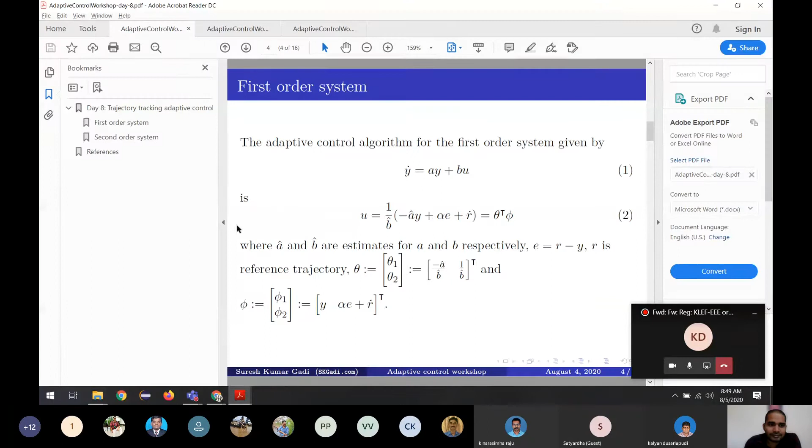So yesterday we started with the adaptive control. What we have seen yesterday is if we have a signal, your output should follow the signal or the reference. You can say if we have some reference, the output of our system should follow the given reference trajectory. But what we have seen is we have kept some limitations on the trajectory. For example, we said it should be continuous, and its first differentiation should be continuous. So we started keeping a lot of restrictions on our reference signal.

But in real life, it is not always possible to keep certain restrictions on the reference signal. So the other method is, instead of going with that, we say we want our system to behave like some other system. So what does it mean? Let us say we have a robot, and this robot is a first order system. And I also know that an RC circuit, a resistance capacitive series circuit, is also a first order system. And I like the RC circuit. So what I want is this robot dynamics should be the same as the dynamics of an RC circuit.

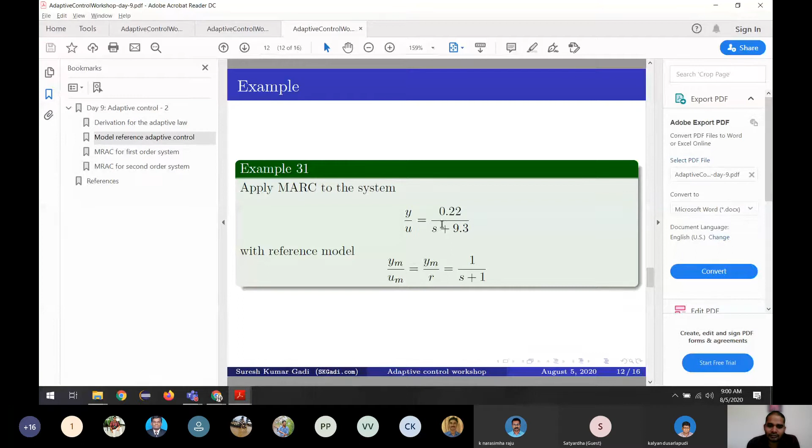So if you see, we have two models. One is the plant model. The other one is the reference model. The plant model is something which you can't change. The reference model is something which you desire to have. So if you see the output for a sine wave,

So if you give a sine wave, the reference is this one, which is almost reaching 1. The plant is behaving a little different. It is reaching less, it's around 0.02. What we want is the plant should have the same output as the reference model.

So we give another example where instead of a sine wave, we will give some other step wave, or in this case I'm using a square wave. Why I'm using a square wave is, initially in the previous algorithm we said we can't use square waves or triangular waves, but here we can, because we are not taking the signal of the reference, we're taking the signal from the output of a model. So let's see how this reacts to this signal.

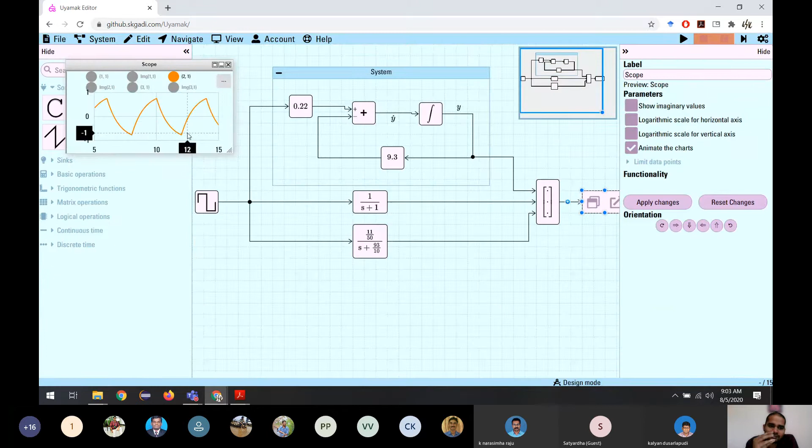But we want our system to behave like this. We can say for now something like a triangular wave. Not exactly, but for our convenience, we'll say it looks like a triangular wave. So our system is behaving like a square wave, but we want our system's response to be like a triangular wave. So we have to apply the MRAC to make sure our system behaves like that. We will apply the algorithm and see. First we will see how it works with the sine wave, and then we will apply it for the square wave.

So before going there, let us see how this algorithm is implemented. Here we have one system. The system is this one, which is a robot. And we have a model. The model is given by this one, 1 divided by s plus 1. So what we want to calculate is theta and phi. If we have theta and phi, we can calculate u and insert it into this.

So let us first find phi. How do we get phi? Phi is a matrix of 2 rows. The first row is y and the second row is r. Y is the output of the system. R is our reference. So we see where phi is. This is phi. Phi is the output of the system and the reference r.

And then we calculate e_m. e_m is from the model's output and our system output. The model output is this one, the output of the reference model. And our system's actual output is this y. So y_m minus y is the error. Actually, we call it error m. So it is the error, the difference between the reference model and the actual plant.

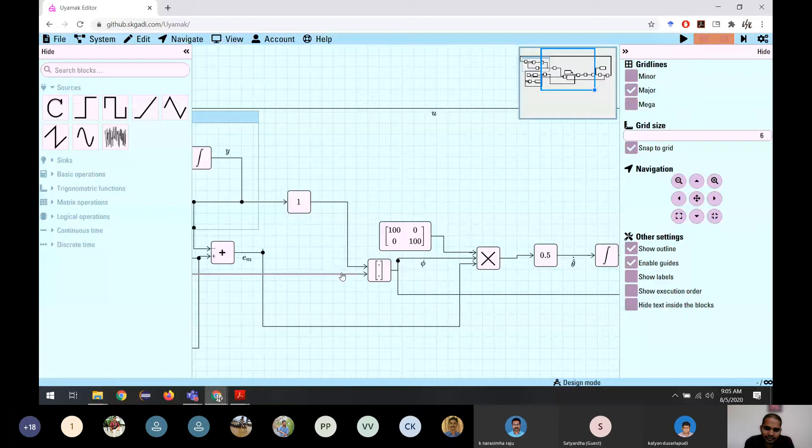And what is the algorithm? It says gamma times the error times phi. So we have gamma, error, phi. We multiply all these things, which gives theta dot. So theta is here, and u is theta transpose times phi. So we are multiplying by phi, and the multiplication of these two gives us u. So we feed this to our plant, to our system.

So let us measure the signals we receive. What we are plotting here: the first terminal is the plant's output. The second terminal is the reference model output. So we say first is plant versus reference.

So what we expect is both should coincide each other.

So at the beginning, we can see the plant is different from the model, but as the time progresses, it's slowly getting closer. I have chosen gain values a little smaller so that it takes long time and we can appreciate how it is converging. So if we give big gain values, it will converge a little quicker.

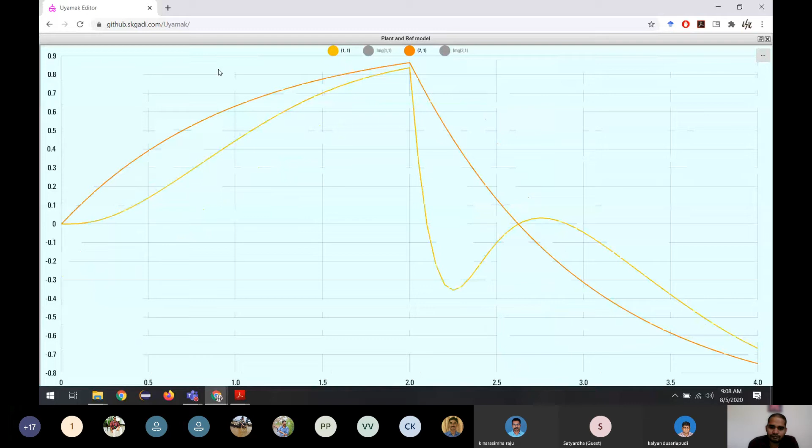So the plant is trying to meet or exactly mimic the output of the reference model. As the time progresses, it will slowly reach and it will look exactly like the reference model. So already we can see it is getting very close.

So from here we can say it is exactly mimicking. At the beginning it was very different, but as the time goes on, see, we can see how it is different. So it is very different. You can clearly see that the controller is updating itself continuously and it makes sure the output is a triangular wave. As I said, triangular is the word I am using for simplification of explanation. So it was something else, but it's adapting itself to make sure it looks like a triangular wave.

Okay, so if you have any doubts, please ask me now.

Let us see an example. We saw this algorithm yesterday. We'll finish the example, and then if you have doubts, please ask me. So what does the example say?

Again it uses our model or our robot, and it says I want this to behave like this system. Why I have selected this system is because it has some oscillations, and you can see that the transition between this normal behavior to this behavior is something little dramatic. So I want to show you that, and we will get some information from that. We can appreciate how the control algorithm is working and the stuff. So I selected this value.

Okay, so let's see how this example we can work out. Before going there, we will see what is the response for this plant in the open loop. So if we go like this.

So what I'm doing, this is a plant and this is a reference model. What I want to see in this graph is, first, the plant and reference model. We will see the responses of the plant and the reference model. So we give a square wave, and we will see how these two look like.

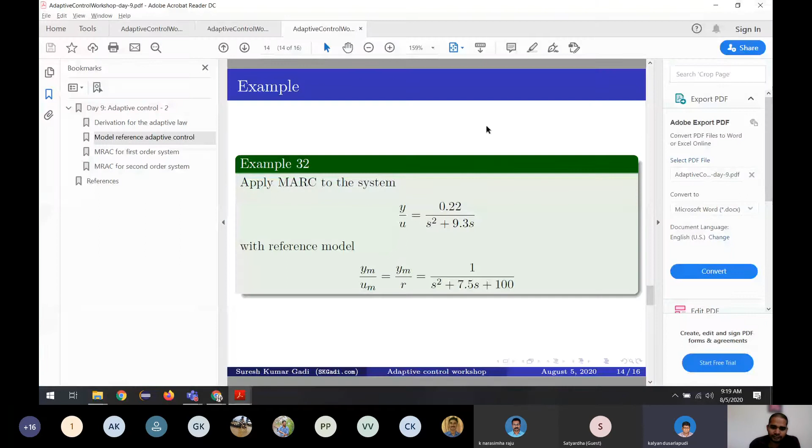Okay, this is our algorithm, and we see it is implemented like yesterday, but let us go very quickly through how it is implemented. So we have a reference model, and we have the plant. We put the plant here, and we have a reference model here. So first, let us try how we calculate this Z.

Z is calculated by, actually it is betas, but I'm using alpha because I copied from yesterday's notes. So alphas are betas in this part. It is y double dot, which is the output. It is the sum of this: y double dot and beta 1 times, or alpha 1 times, the error between the model and the actual value. E is the error between these two. This one is E dot and this is E, so this is after differentiation and this is before differentiation. So you are getting this.

So this is what we are getting here is Z. Then what is the phi? We have to get the phi. Phi is of 3 elements: the first element is Z, then Y dot and Y. We changed the order a little, but it should work.

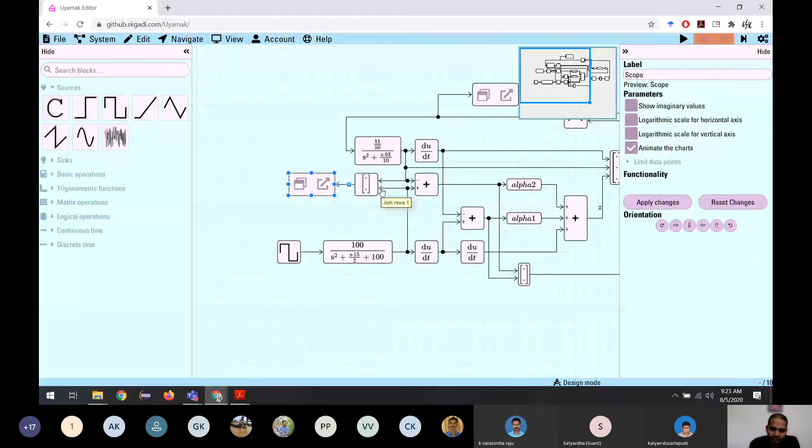So what is the graph I'm drawing? I'm drawing between the first one, the reference model, and the second terminal, the plant's output. So we say it's reference, and let us run this and see how it behaves. Let me start. If you see, both are coinciding exactly, so we can say our algorithm is working and both are converging.

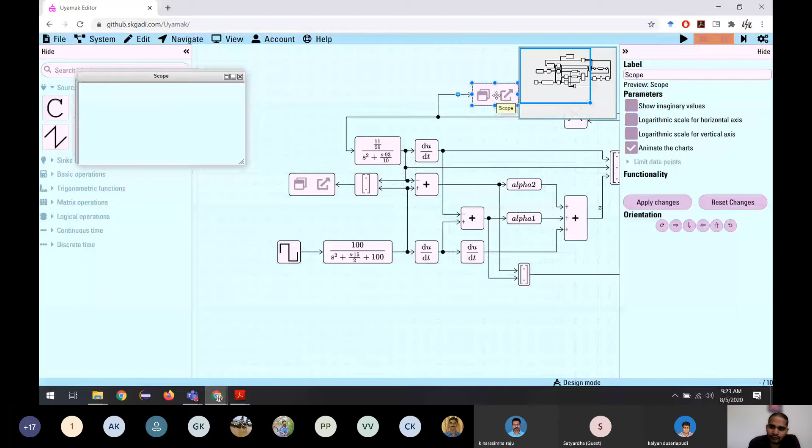Let us see what is the output. What we are seeing is the output of the algorithm, or input to the plant. This is U, so what we are plotting here is U, input to the plant. Let us run this and see what we are giving as input. Let us start. So to get the desired response, what we are giving to the plant is this signal. If we give this signal, only then does our plant behave like how it is behaving.

So how do we come up with this signal? By using adaptive control. Now let us see by giving a little gain. So now what we are giving here is a big gain, and it is immediately adapting very quickly. If you see here, it is adapting in less than 0.5, or 0.05, or we can say by 0.1 second, it is almost mimicking the model. But what we'll do is give a very small gain. The gain I'm talking about is the gamma. Where is the gamma here? This is the gamma. The value I'm using looks like a small number to us, but let us see what's the value.

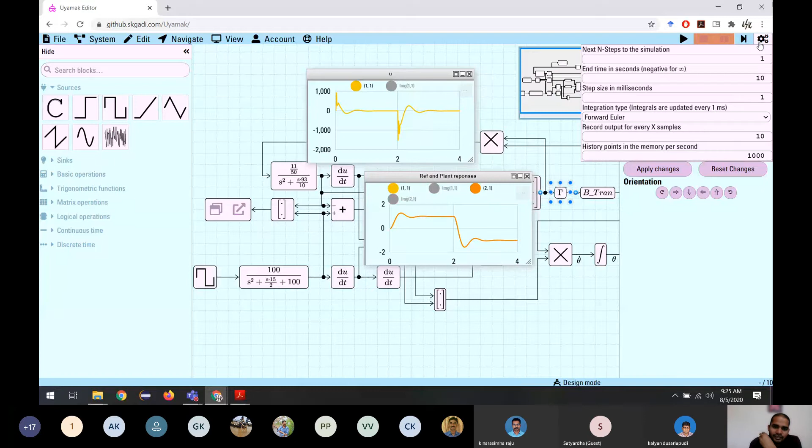The gamma we are using is 0.1 here in this example, and it is giving very quick convergence. So this is actually good for us, but for our purpose, for our understanding, let us give some very small gamma and see how the system is updating itself, how it is adapting itself to improve itself. So let us plot.

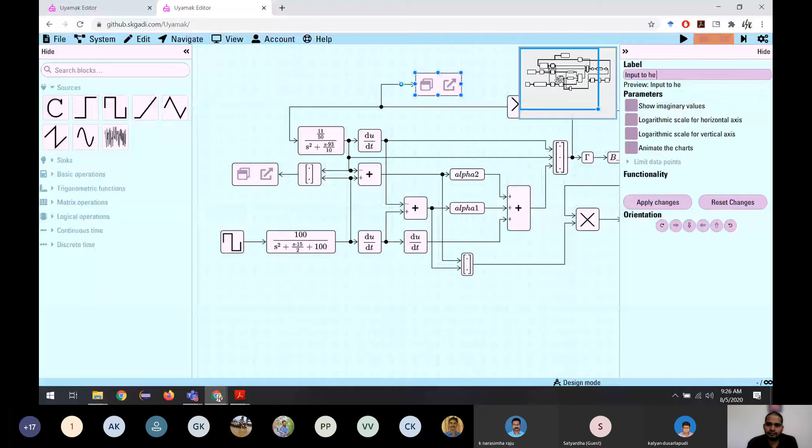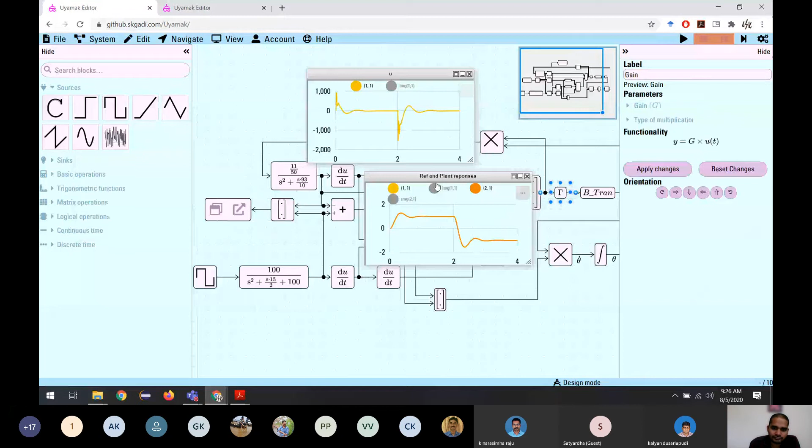This one is called reference and plant responses. So let us plot these two things. The input to the plant we have to give this, and we are receiving this. So we can see here the U is something like this, and the reference is this, and this is the behavior.

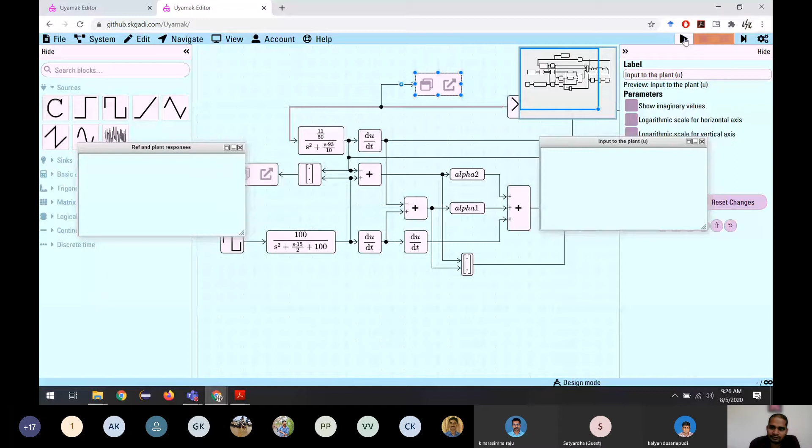So what are the gains we are using now? The gains we are using is a very small value, 10 to the power of minus 7, 0.000 with some 6 zeros and 1. So let us see how it behaves. As it starts, this is the control, and you can see it's adapting. If we observe here, it's behaving something very different, but slowly it tries to reach, it tries to mimic

the reference model. Until now it is not; you can see it will continuously try to change itself. It's updating, it's adapting itself to mimic the reference model as the time progresses. So by now you understand that as the time goes on, it will converge to the reference model. We can stop here because it will take a lot of time. Since the gain is very little, it will take a lot of time to exactly coincide.

But this is how we can see that the adaptive control is working. So this is all I wanted to show. If you have any doubts, please ask me.

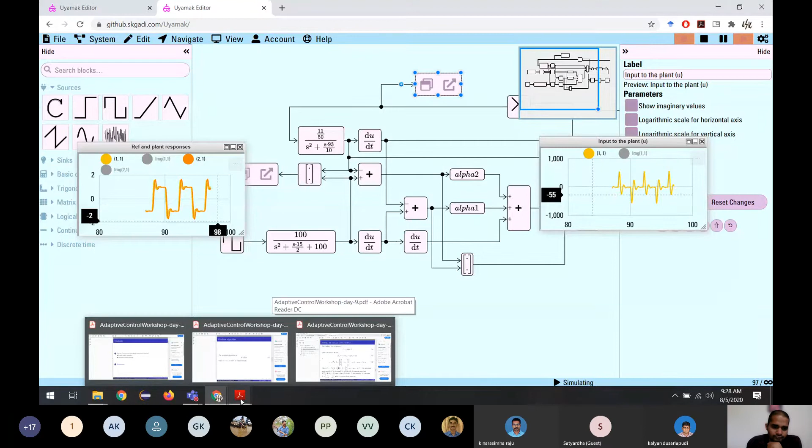So it will take some time for both to be exactly the same. But the big effect you can see at the beginning of the plot. It's plotting something and slowly it tries to converge with the reference model's output. If you have any doubts, please ask me.

Will this algorithm help us to maintain platform stability, where the system has to follow the reference, which we call a stable system? Yes. So when, in practice, the parameters change all of a sudden due to a sudden impact or some external inputs, will this algorithm still help us there? Yeah, it will help us, in certain cases.

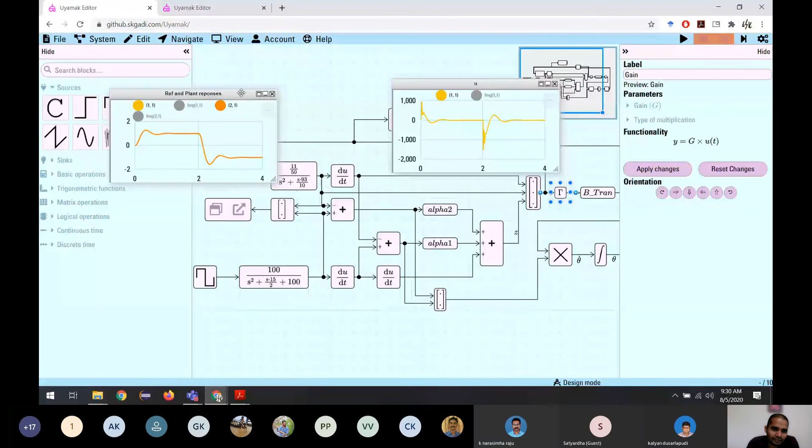Do we need to wait this much time? 60 minutes already, right? So the gain matters. The gain is what's called the adaptive gain. How quickly you want to adapt, it gives that value. If you give a very big value, it will reach quickly, but it will always remain with some error. You can see this one reached quickly, but if you go a little closer, there is a small error between these two, and this will never be rectified because the gain is too big.

So if you want very accurate following of the model, you have to select a little less gain. It will be more accurate, but it will take longer to reach. So you have to make the trade-off: you want quick convergence, or you want to converge slowly but get the most accurate value. You have to decide what your requirement is. In this one, we said it can be accurate but take a long time, just to see how it is adapting itself. So it's taking a very long time to adapt.

And regarding the changes, with adaptive controllers you can't change big values in a short duration. I mean, the parameters should not be changed with big differences, like from 1 to 100. You can't change like that. It can go slowly over time. It can go from 1 to 100, but not in 1 second. It should take some time. Only then can we guarantee that it is stable.

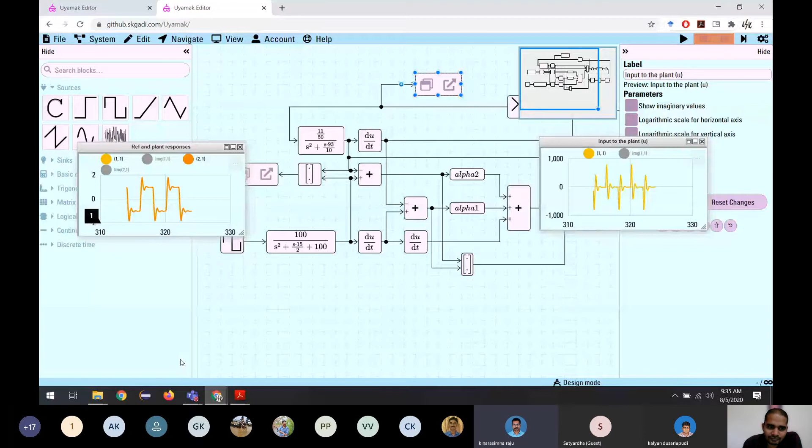Suresh, this reference model, whatever we are using, should it be kept in tandem with the actual model always? Because whenever the parameter is changing, the controller has to be retuned again, right? No, sir, no need to retune the model.

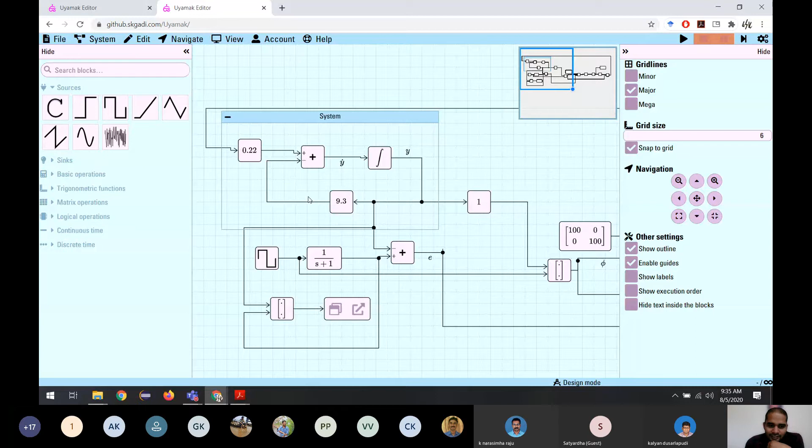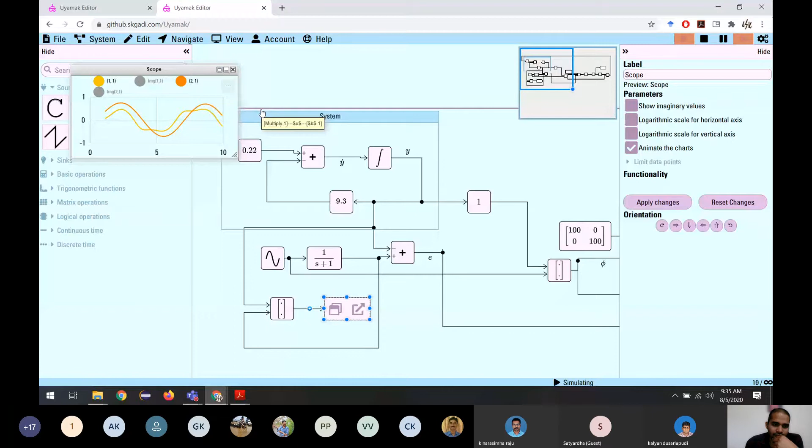Let me see if this example works. In this example, I have designed it so that we can change the parameters. Let us see by changing the parameters in this one, sir. So let us run this and see. Now instead of a square wave, let us use the sine wave, which is easy to converge. Let us wait a while until it converges, then we will apply this.

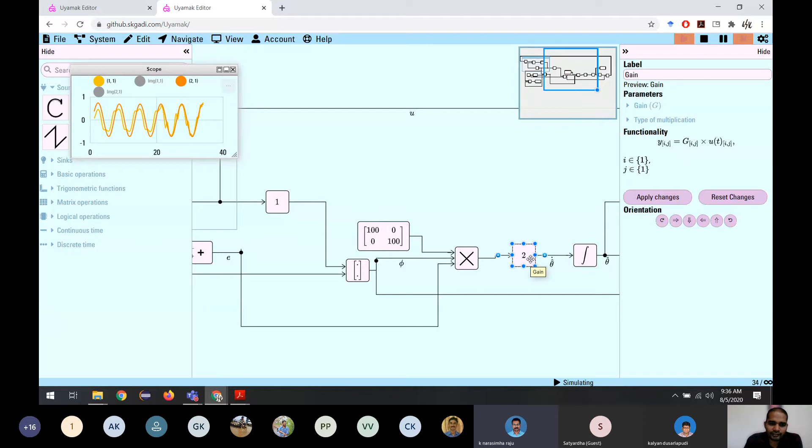But how does this conceptually happen? The controller and plant together are made to mimic the reference model, right? Is that what is happening? No, the reference model, if I show here, is something we are not touching, sir. What we are changing is the plant.

Controller and plant together are made to mimic the reference model. Is that what we are doing here? Yes, sir, you are right. So if the plant parameter changes, then obviously this reference model has to be kept in tandem with the plant always, right? How does this algorithm adjust itself if the plant model changes?

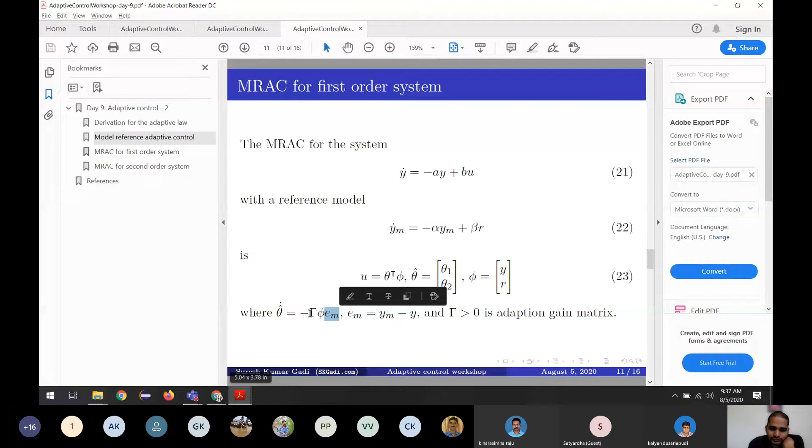Yes, sir. That we will see, because this is how the adaptive controller works, the gains are always changing. If you see the algorithm here, theta is updating all the time. Theta is not something constant. You see, theta is updating with this gain and with the error. So theta is updated by all these parameters.

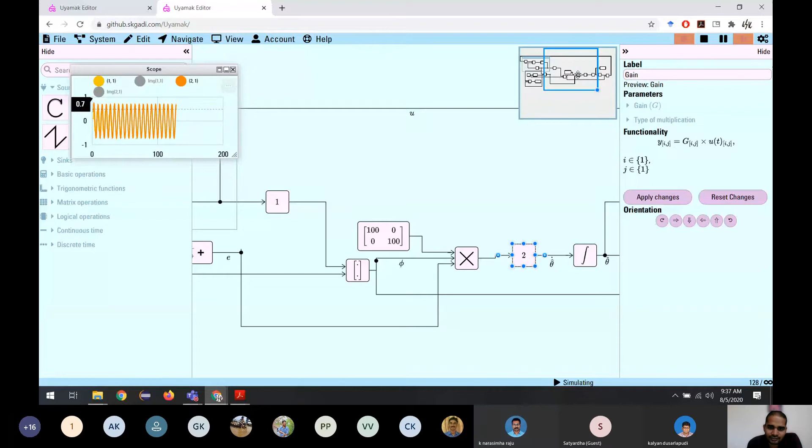E is the error, and P is something which makes sure it is stable, because we have done stability analysis and come up with this value P. And gamma is the gain, how quickly you want to reach convergence. So we can see the system is working; here both are coinciding. Now let us change the value of this parameter. Instead of 0.2, let us say it has become 0.5. Let us see if it works or not.

Here the reference model is still kept together. Yes, sir. The reference is the same, so you want our plant to behave like that. So if the parameters are changing for the system, as the plant changed, we can see there is some disturbance here. But as the time progresses, the adaptive controller gains are adjusted so that now we can see again it is mimicking the reference model.

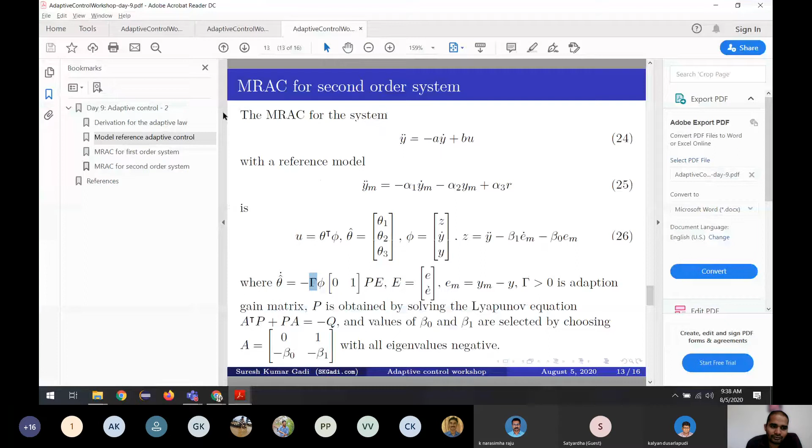Reference model has always to be in the control algorithm? It has to be there. Yes, sir. Reference model is something like how you want it to behave, so you always keep it the same, sir. You can change this as well. I can change it again. It will get adapted. Yes, sir.

It will be continuously adapting itself. So whatever you change, it will try to adapt itself. So you made some change here, but it adapted itself to make sure the output of the plant is the same as the output of the reference model.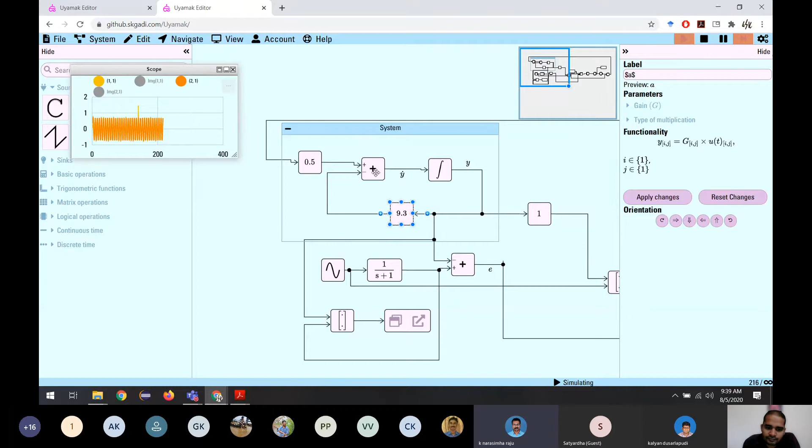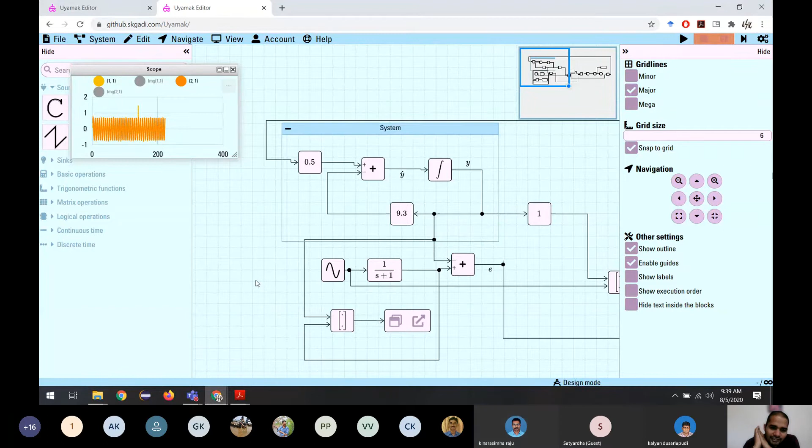Normally, the reference model which we take will be a kind of linear system. Because there will be a lot of non-linearities inside the plant, will we be able to adapt to all kinds, or are there some limitations in getting adaptation? Yes, sir. So whatever we are seeing here, it is only for the linear systems.

For the non-linear systems, there will be a lot of other things we have to keep in mind. For example, they'll remove the non-linearities by some other algorithms, which we are not seeing. If you have a nonlinear system, first we linearize by doing some changes like state feedback, and in that we try to implement the inverse algorithm by identifying the parameters and other stuff, which we didn't see in this course; it should be more in detail. There are algorithms which can do it, but not for all the nonlinear systems.

The nonlinear systems are like a very big chunk of material we don't know. Only a little part of the nonlinear models we have done. I mean, we means the whole world, the mathematical people, who have done only a small part of the mathematical nonlinear parts of the systems. Even for a simple pendulum, there is no perfect model which can say this is how the simple pendulum works. So there are big holes in the mathematical modeling and implementing non-linear control algorithms. So whatever we have is a very small tip of nonlinear algorithms.

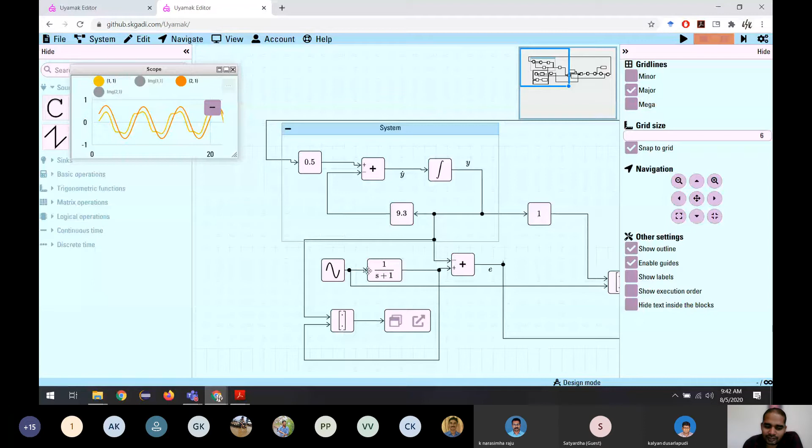So basically, adaptive control is used where there are variations in the plant parameters, and to adapt the controller to variations in plant parameters, we use adaptive control. Yes. Can it also be done for variation in states? The states are always changing, sir. So what we are saying is the states of this system should mimic the states of our reference system. So if the output is mimicking, internally, it is not always guaranteed, but most of the time the states are also mimicking the behavior of these states.

States are always changing, so only the parameters are somewhat stable in a system. Yeah, states are continuously changing. So can this even get adapted to changes in state also? Yes, sir. What this does is it changes the states in such a way that the system behaves the way we want. Okay. Yes, sir. This controls by controlling the states, sir. Okay, sir.

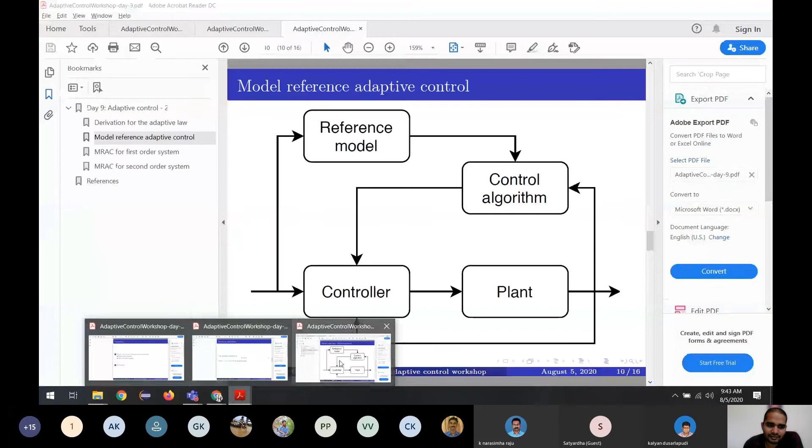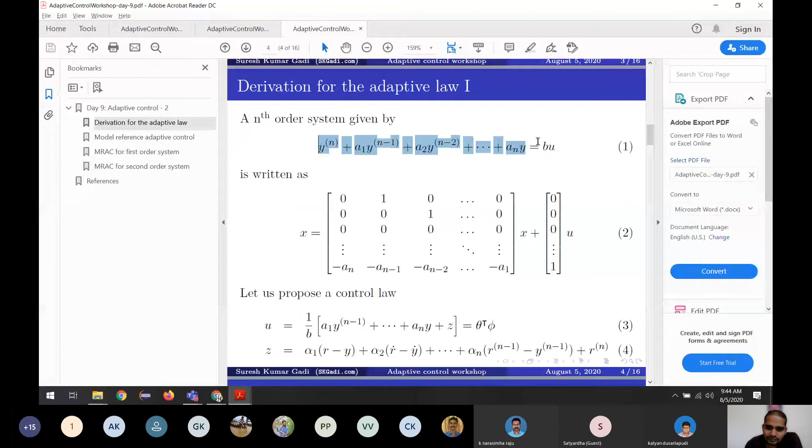Okay. So let us quickly go through this derivation process, what we saw yesterday, a little. Okay, so this is a system we said we want to control. The algorithm we are seeing is for following a trajectory R, the reference R. So we have this system and we saw yesterday how to write it in state space. U is the input to the system. What we want to give as input is this part and these terms.

In this, what is Z? Z is defined by these terms. Okay, so here we know everything except the Z. So let us write it in the form of theta transpose phi. The theta transpose is this, theta 1, theta 2. What are the thetas? Thetas are A of i divided by B. So you can see A1 divided by B is theta 1. So what is the last term? The last term is 1 divided by B, so we call it beta. Beta is 1 divided by B.

And what are the coefficients of this? Here this side is y to the power, as we said yesterday, y to the power of n-1 in parentheses; it means we are putting n-1 dots, or we are differentiating y with respect to time n-1 times. So these are differential equations, and we write them here in this vector. In the last term we know it is z. But what is z? The z is these terms, alpha 1 times r minus y and all these things.

If you put this equation 3 into our actual system, we multiply u with the one we have proposed here. So what do we have? This b will cancel with this b, and this a n minus 1 will be cancelled with this one. So all these terms are cancelled. So what we have is z, nothing else. So y differentiated n times is equal to z. All other terms are removed. So we are removing all the system dynamics and injecting some new dynamics with z. So what is z? All these things, right?

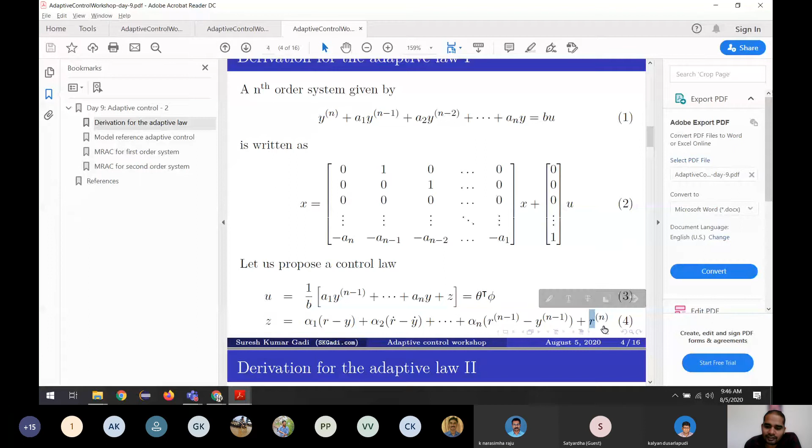All these things are on the right side, and we have one extra term r of n. So what is r n minus y n? It is e of n, right? We define e as r minus y, the reference minus the actual output y, which is the error. So what will we have? This equation: e differentiated with respect to time n times, and the terms alpha 1, alpha 2, up to alpha n. We can select the values of alpha in such a way that the system is stable.

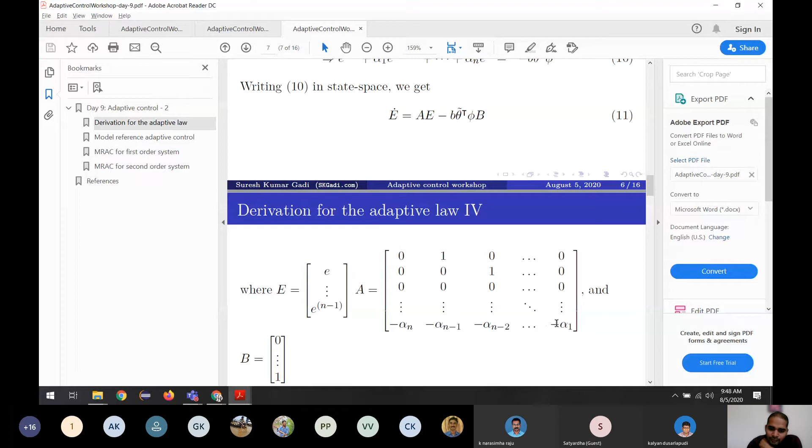So how do we select? We can write these alphas in a state space model. Let me show that here. Write E in this way. The A is this one, if we write it in state space model. So we can make sure this system defined in 5 is stable if and only if A has all its eigenvalues negative. We make sure the eigenvalues are negative by properly selecting these alpha values, and so we make sure this system is stable.

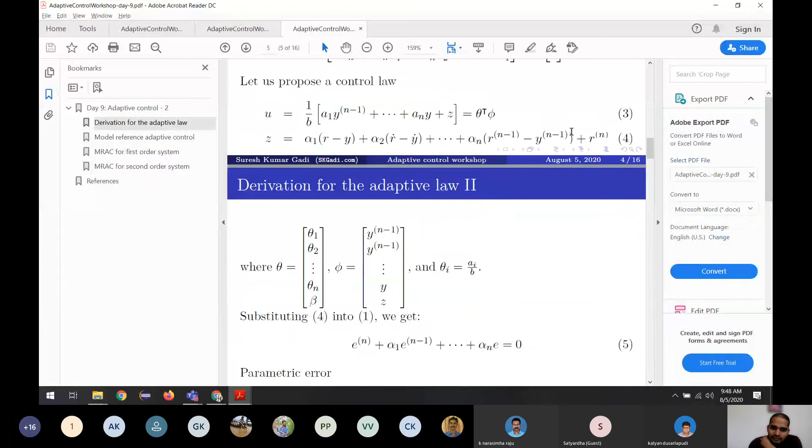So if we know the actual values of theta, our problem is done. We say it is stable, so the error goes to 0 as time goes to infinity. If error goes to 0, reference minus y is going to 0, so the reference is equal to y. So 5 is the end of the problem. But in real life, we don't know what theta is. If we don't know the value of theta, we can't put these values. The thetas are A and B values, and we don't know the actual values of A and B because the actual plant is not available to us.

So what we do, we say theta cap is the estimated values, theta is the real values, and theta tilde is the error between these two. So the theta estimated value is error plus the actual value. So actual value plus the error is the estimated value. So what we have is some estimate of theta.

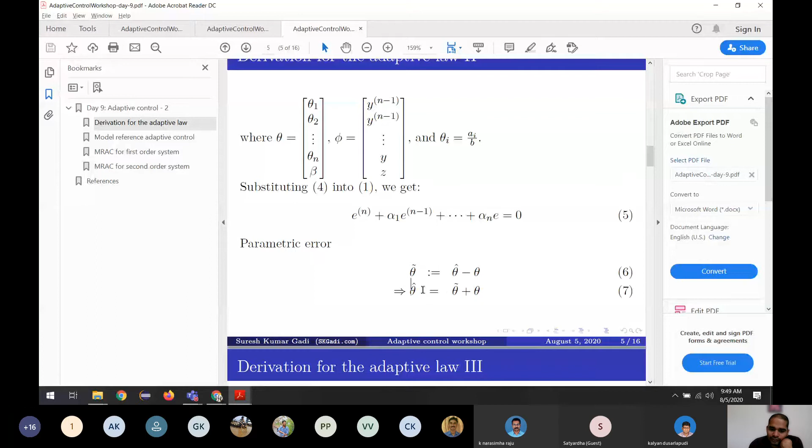What we do is, instead of using theta, we will use theta estimate in our equation. So if we have theta estimate, we can divide it into two terms: theta, the actual value, and theta error. So with this, we already know if you put theta.

You said you're going to spend this day with me. Okay, no. 1 second. Okay. Yeah, I'm sorry, my daughter woke up.

So let's continue. So here we are saying instead of theta, we have theta cap, which is the measurement. So theta cap is sum of actual values and the error value. So with the actual value, we already know the whole equation is simplified into this one, the E. And what is remaining is this part.

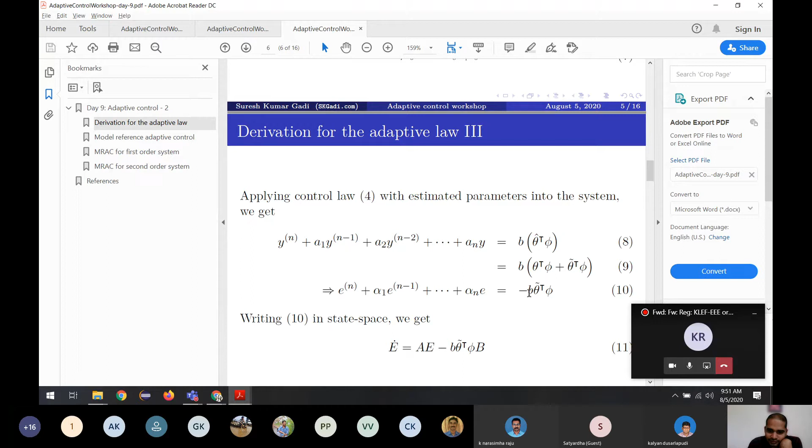So if we make sure this is going to 0, the whole thing is equal to 0, and we know if this thing is equal to 0, the error, this is a stable system, so after some time the system decays or goes to 0, the error is 0, and we can say y is equal to r. So what we have to make sure is this is equal to 0. So how do we do that? So we come up with some techniques.

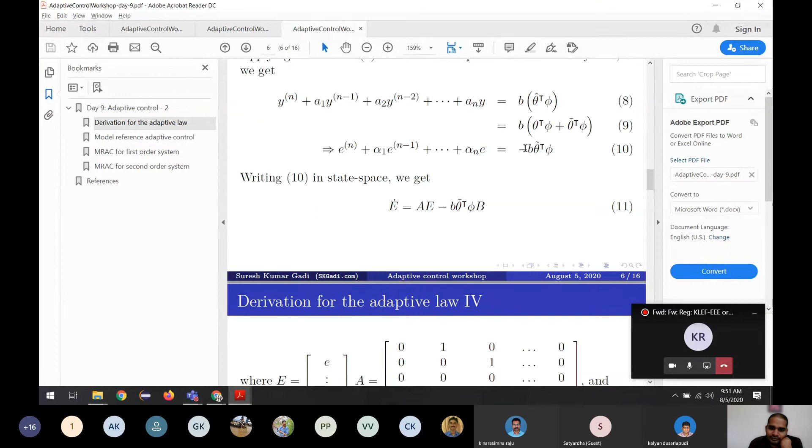So first we write this in state space way. So E dot is equal to AE minus this one. So this is a matrix. If this is a scalar value, if you want to write it in a matrix, we multiply with B. So what we have, B is all zeros, only 1 in the bottom. So this is a Lyapunov equation. What it gives is it makes sure the system is stable. So if this equation is satisfied, the system is stable.

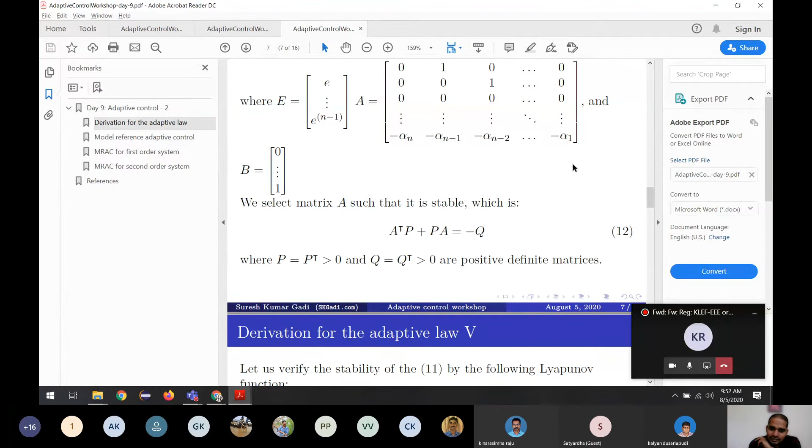So we already selected A, right? So the system is stable. So we can say equation 12 is valid already. So for some values of P, A transpose P plus P A, the output is minus Q. Here the P and Q are positive. What do I mean by positive? They are symmetric and also they have positive eigenvalues. So this equation, we know it is true because we selected A in such a way that it makes this true. So we go with the next part, which is writing the Lyapunov function.

So if someone doesn't know how this Lyapunov function or Lyapunov stability theory works, I will give one small analogy. The analogy can be like if we have a system and we want to see if the system is stable or not, what can we do?

1 second, please. Yeah, I'm sorry again. So, okay, let's continue.

So I was telling about the Lyapunov function, how we can give a small analogy. So if we have some system, for example, our planetary system, the solar system, Earth and others, how can we make sure the system is stable? One way is to say if there is no energy getting into it, or if the energy is always decreasing in a system, we can say that the system is going to be stable in the future.

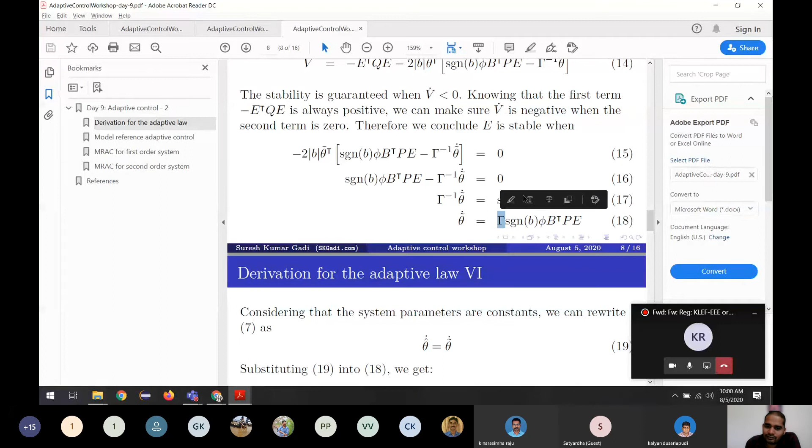Here gamma can be anything positive. But what we are saying in our algorithm is, if you give bigger values of gamma, it converges quickly. If you give smaller values, it converges slowly but reaches an accurate value. That is something we are learning by doing some experiments.

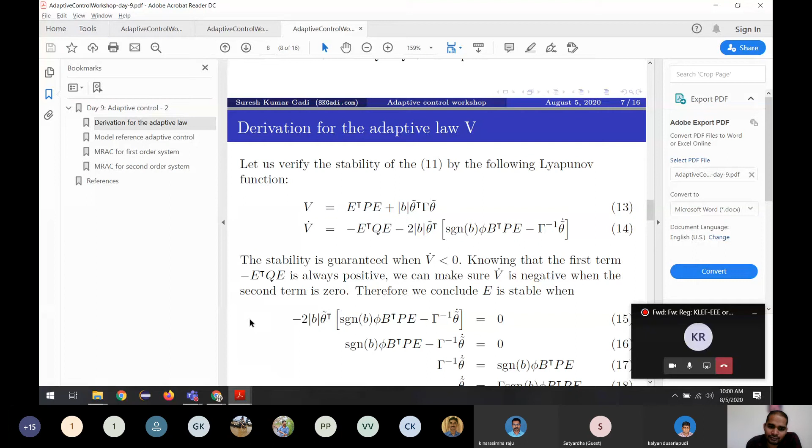So mathematically we prove this. If you see this differential equation, it is done for the error in theta, not for the theta estimate itself. But what we want is the theta estimate, right? So here is another assumption we are doing.

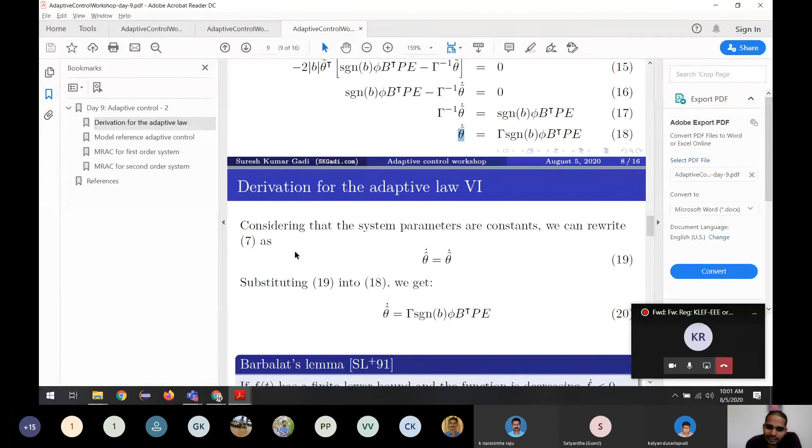If you go to equation 7, it says theta cap is equal to the error in theta plus the actual value of theta. If we differentiate, what we get is: theta estimate dot is equal to error dot plus theta dot. So theta dot is the change in theta with respect to time. What we consider in this algorithm is that it is equal to 0.

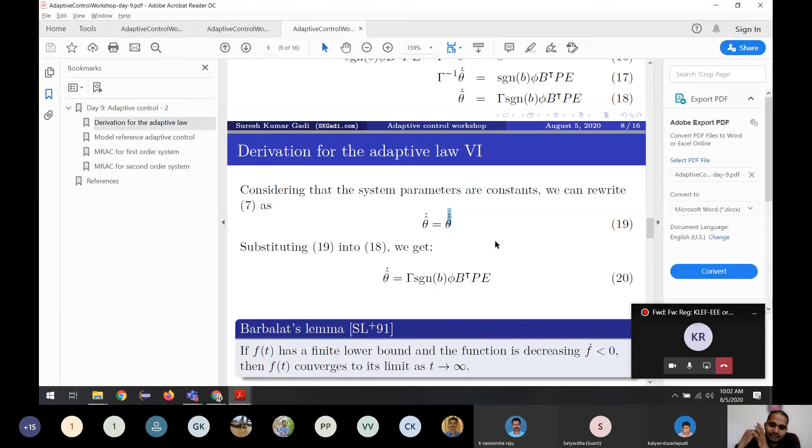So that's why I say it will be useful, but you can't make very quick changes in theta dot, because if there is a big sudden change in the parameters, the system may go unstable, since we are not using that condition here. We are saying theta change is always associated with the error, not with the change in the plant. So if the plant itself is changing, this algorithm won't be effective. But if it is changing over a long period of time, we can consider theta dot is very close to 0 and this algorithm still applies. If the plant parameters are changing drastically, very quickly, this algorithm won't work. So finally what we get is theta dot is equal to this.

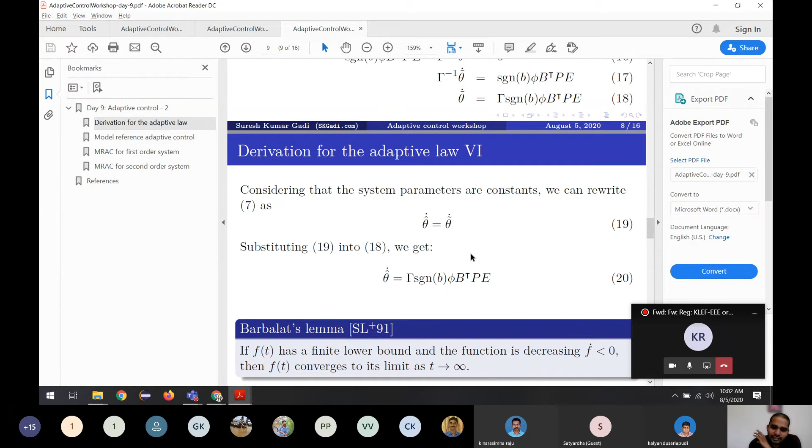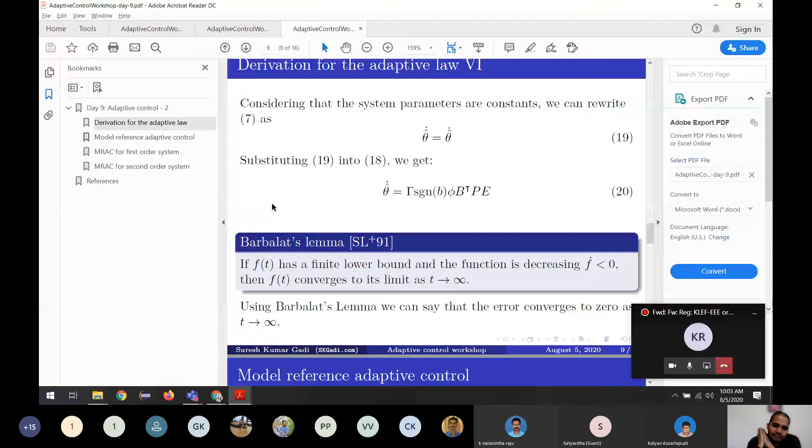So this is the control algorithm we are applying. In this part, I skipped the sign of B because we are taking it as positive or negative, so I'm directly using those results. And there's the Lyapunov explanation itself. To make it complete, there is one lemma called Barbalat, which is worth reading once. What it says is, if some energy is continuously decreasing, it will finally reach a zero state — something similar to that, explained in a mathematical way. It's better you read it in the textbooks of Slotine, which is in the references. You can see the book name in the references.

Okay, so this is the derivation of how we get the control algorithm. If someone is interested, they can read it. Maybe I explained it very quickly and it may not be very clear. It may be demoralizing to someone who knows and wants to work on it, but don't get demoralized if my explanation is bad. I'm sure you'll understand better if you read the book. Please tell me if you have any doubts.

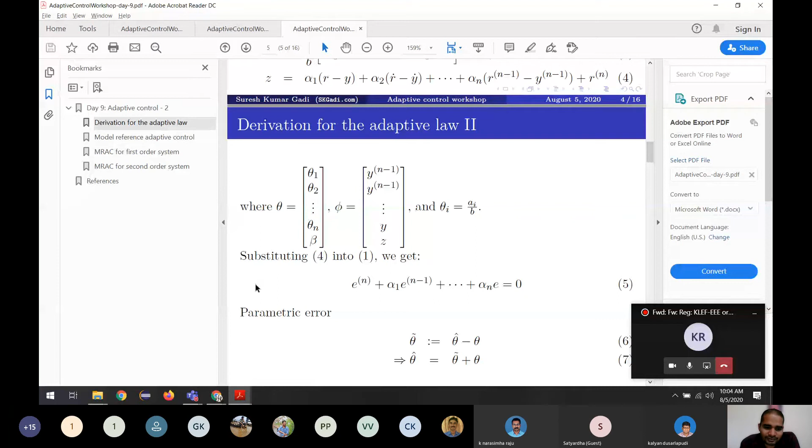So apart from this model reference, do we have any other adaptive control methods? Yeah, there are — for example, last time we saw trajectory following adaptive control, and today we see model reference adaptive control, right? So like that, yeah.

I'm not clear why we need to take the square, because I've seen that square gives us energy and an equivalent term — we will calculate, and why it should always be positive. Does that mean any positive term indicates it has some energy, or equivalently we are converting it into energy? Is that what this algorithm does? Because as you have told, in many control algorithms I have seen that you take the square so that it becomes always positive. Yes, sir, like while calculating correlation we always take square, since square is always positive.

No, I didn't clearly understand why it should be only to say that taking the square represents energy — in some way it is energy. But why do we need a positive thing? Does that mean square terms always give positive values, so any positive term will be a square or something like that?

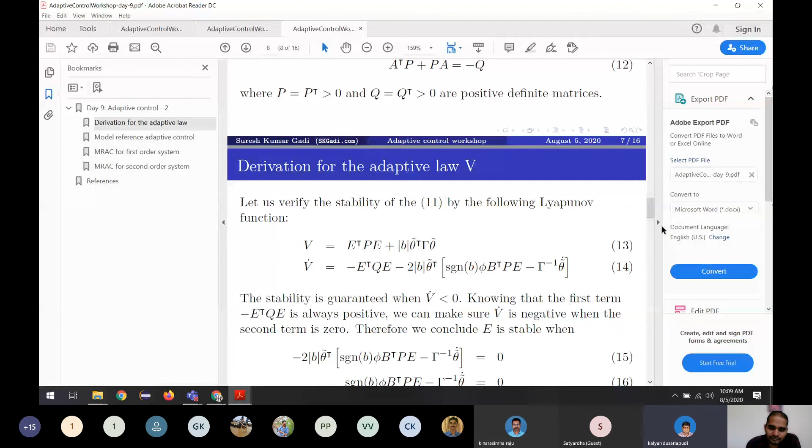So this is the end of all nine days of the course. If you have any doubts from any of the previous classes also, please, you can ask me now.

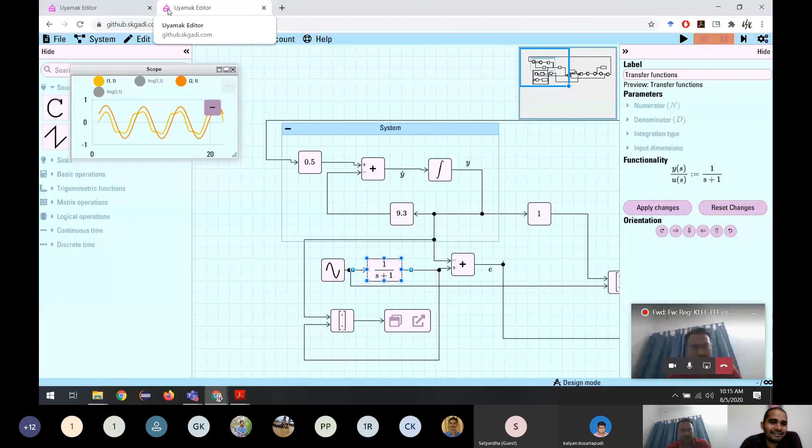And the funny thing is, when I searched Uyamak in Google, we got a Telugu meaning for that. It's like learn. Kalyan, what are you saying is the meaning of that? Look and learn. I didn't know that. In Google translations I got that, like a good platform to learn and explore. Fortunately, it matched with your intention, right? That's great from your side, Suresh.

Wonderful work that you are doing for the students as well as for the development of your skills, to make engineering and maths easy for the next generation. We need such kind of tools, which are so promising and will give us a path for new creations. Thank you so much, Suresh.